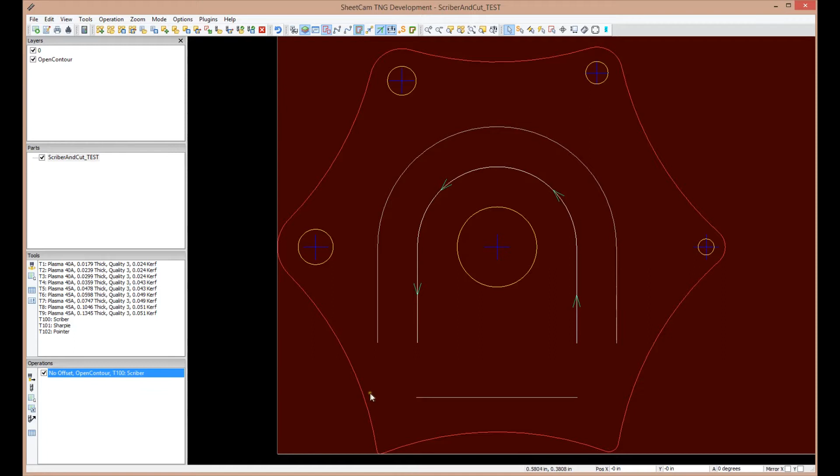Once again, new jet operation. This time we're going to pick an outside offset, which is the most common, and we're going to pick layer 0. See it all go white? It was selected. And for our tool, we're going to select the tool for 16 gauge, which is 0.0598.

Now, we do want an overcut. And if you recall, an overcut is once the plasma has finished cutting, it will continue along the path, however it will turn off the torch. This is recommended by the plasma manufacturer. We are going to do that, and set that value at 0.15.

Since we're cutting, we do want path rules, and we're going to select rule set, once again explained in an earlier video, and we do want a lead in as well. We'll go perpendicular, say okay.

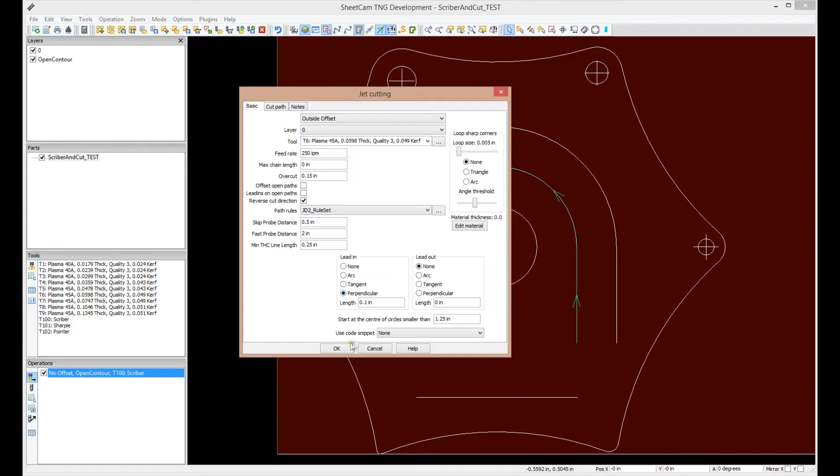And there's our part right there. Once again, it's warning us because this particular part has a very small hole over here, but our rules will take care of it, don't worry about it. Anyway, let's go ahead, use the mouse wheel and zoom out a little bit, and there's our part.

We could go ahead up here, we could generate G code like we did before, and say you want to place it. Sure, I do. It just did it.

But now on this particular part, let's go ahead, or file, let's go ahead and save it as a part, because right now it's an imported drawing. We're going to go to File, Save Part, and it just did it. And it saved it under the name that we brought in the DXF.

If you chose to save a different name, you could save parts as, and right here's where it saved it. We could call this thing anything we want, you know, newbie or something like that, and say save it. Now it's saved as newbie.

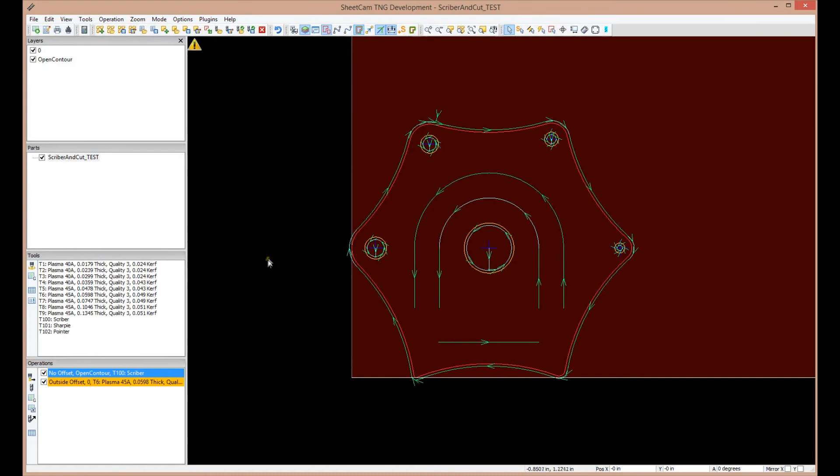But I think we better save the part as what we were talking about right there. All right, so anyway, there's our part. Now, what we want to do is right click on the background and fit the material, and let's talk about duplicating this part, rotating the part, etc. What we need to do is go to mode nesting, click on that.

Now we're in nesting mode. See how it went white because it selected it.

Let's zoom in so you can see it a little better. I could left click on the part and now drag it around, let's drag it away from the edges of the metal.

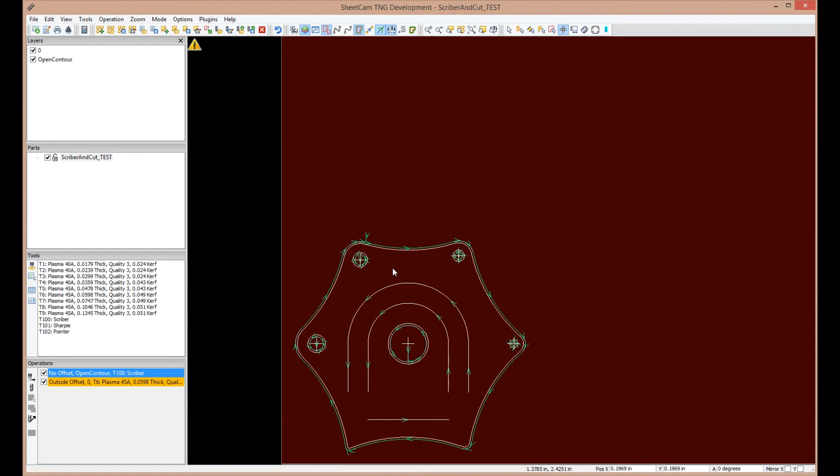We've got it there. I can also right click and bring up other options: copy, duplicate, multiple duplicate, array, etc. Duplicate means we create a duplicate part, move it where we want, and say okay. And that's that, and it will work for a single part.

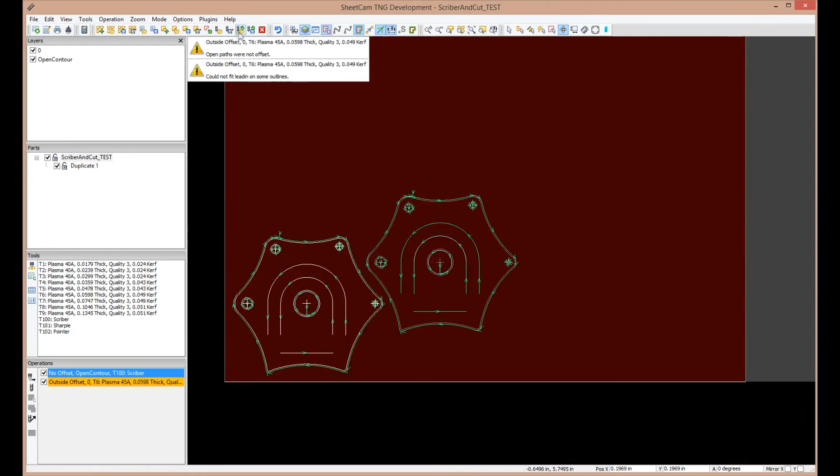Now let's go ahead and hit the undo button, or you can Control Z, to get rid of that part.

Now let's right click on it, and this time we'll say multiple duplicate, and what that's going to do is allow you to just keep on putting duplicates until you're finished. Once again, Control Z or the undo button, so I get back to one part.

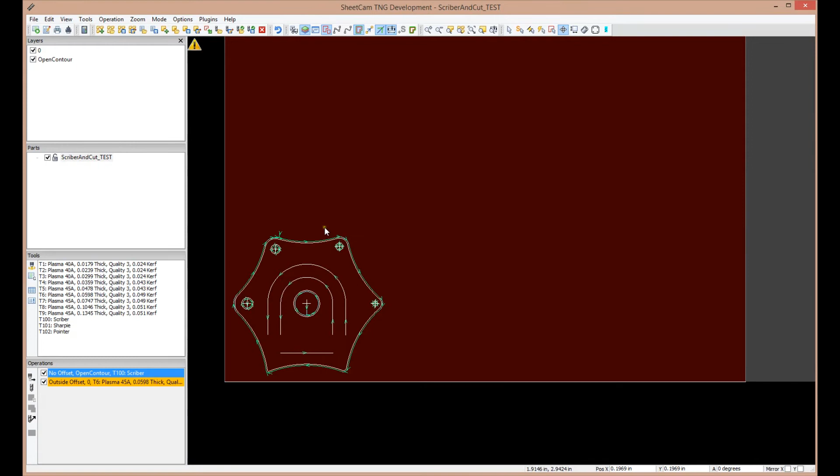Now this time I am going to right click, zoom to fit material so I can show it all to you, and we're going to create an array. So with array, you could tell it how far apart the array area, how many parts, etc. Or you could just tell it fit to material. So you could play with these later.

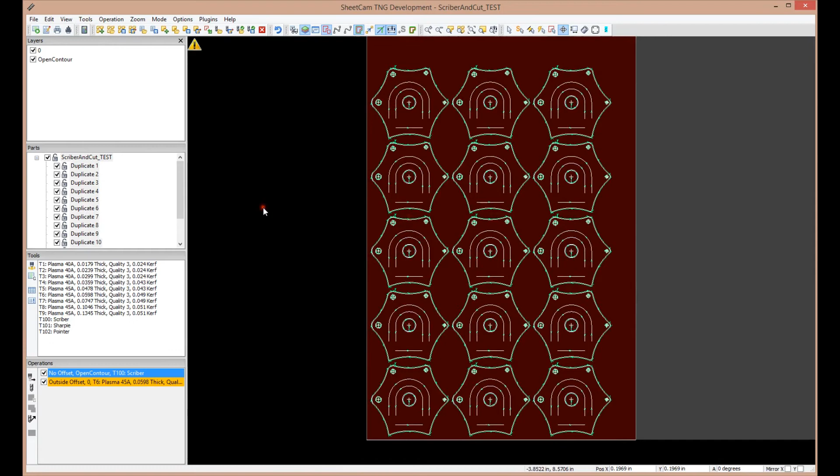Now, if I wanted to move them all, I press my left button, drag my window, and now I can kind of move them around. Let's go ahead and get rid of some of these parts right here. We'll get rid of all of them, actually.

We're going to right-click right here, and we are going to just create a simple array: one row, 3 parts. Okay, there they are. Now, we think we can move those 3 parts a little bit closer together.

So we're going to select the second one right here, and if you look down on the right side, you'll see a little label with an A on it, 0 degrees. That's the rotation of the part. You'll see X and Y also down here. Remember, the CNCs are X, Y, Z. Well, A stands for rotation, and SheetCam uses that same nomenclature.

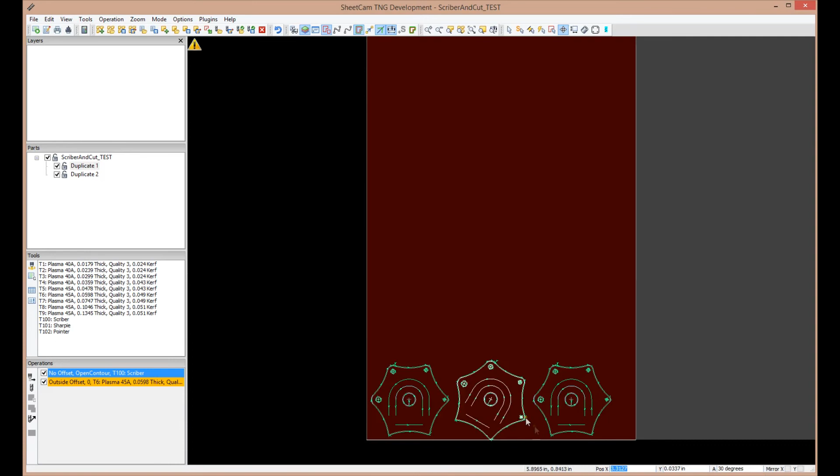Let's go ahead and change that number to 30. And look, our part has rotated right there. We're going to zoom in a little bit.

Once again, it's selected, so I could hold down a button and move this part where I want to go. The way I'm selecting them is I'm just left clicking on the part and then holding the button down. And there you go, we've rotated our parts.

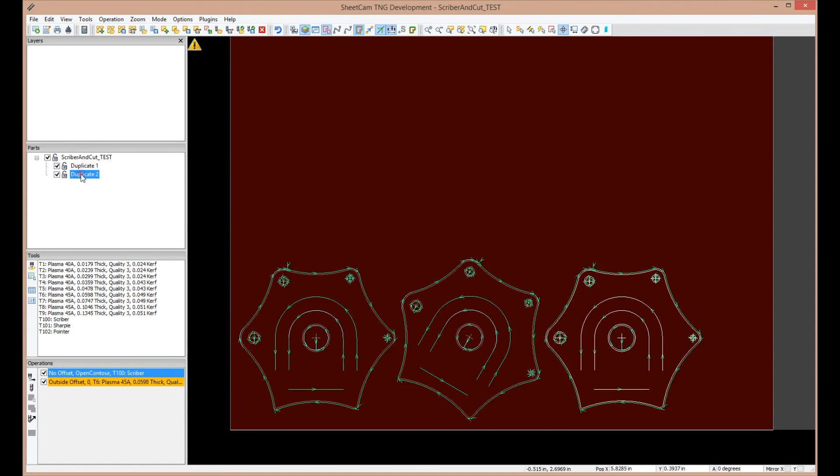And if you notice, if we clicked this one, that's that one, the second one, and the third one. All right, so now what we're going to do is right click, fit to material.

Let's go ahead and add a different part, one that we had imported before and saved as a part. We're going to go to File, Open Part, and that's going to be the pumpkin. So there's the pumpkin right there.

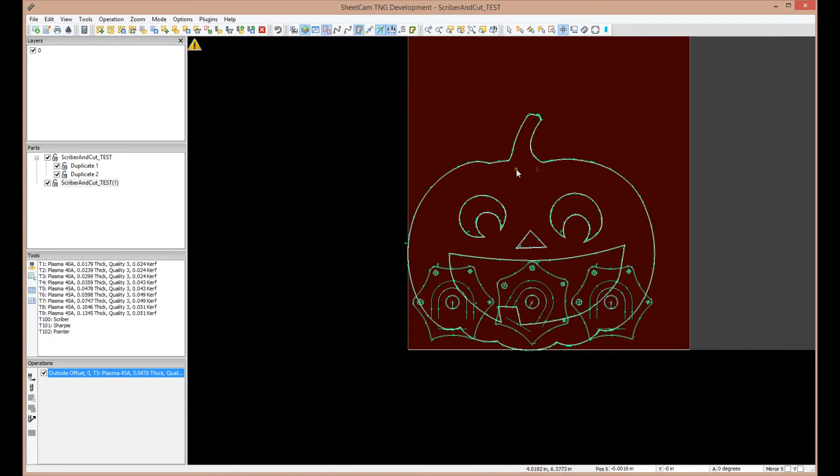Now, obviously, we can't cut that, everything's overlapping. But see how it's white? That just means it's selected. Hold down your left button, drag it up, and now we're right there. And if you notice over here, we now have the pumpkin there.

Let's right-click, fit to material. Now we just go ahead and create our G-code, and we're done. We're ready to go out there and cut all of this out right here.